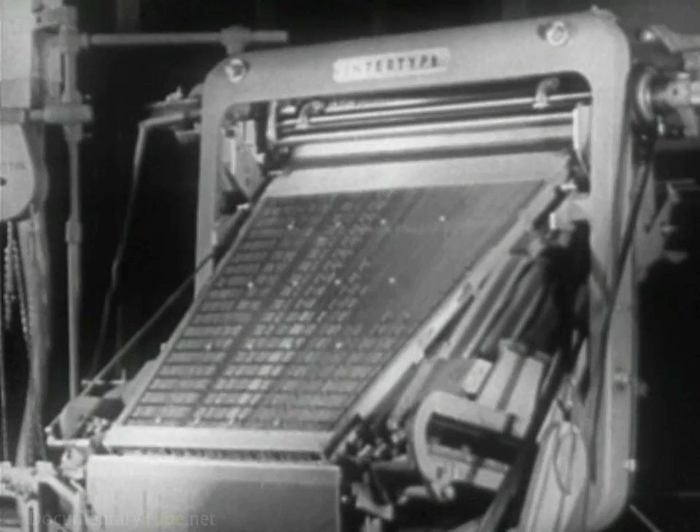Machines which set type up in lines cast from molten metal, first introduced at the close of the last century, are now the most widely used.

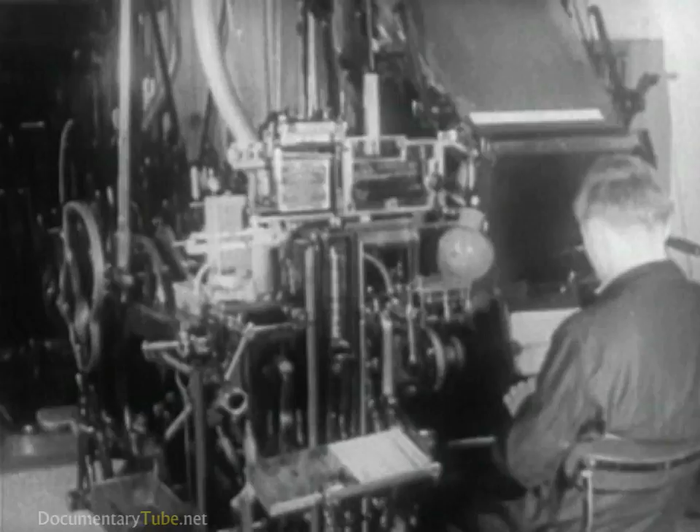Automatic typesetting of complete lines. These are the intertype and linotype machines, which are essentially the same except for the vast assortment of models designed to perform the particular needs of various types of special jobs. These composing machines produce type cast in complete lines or slugs. Here is a slug or line of type turned out by these machines.

The lines of type, properly arranged, make up the page from which, after inking, the imprint or proof is made.

The function of the keyboard composing machine is to produce the essential materials required to prepare a form for printing. But before going into detail, let's first get a general view of the whole picture.

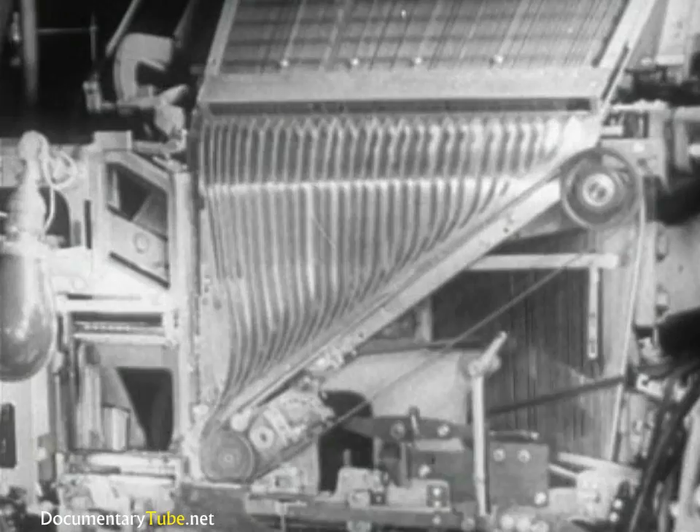The operator, depressing the keys, releases matrices from the magazine channel. The matrices are delivered to the assembling elevator in the correct sequence.

Here's a close-up of some mats. You can see the letter that has been punched or engraved, into which the molten type metal is going to be injected. Let's note particularly the two punched characters, one Roman in style and the other italic.

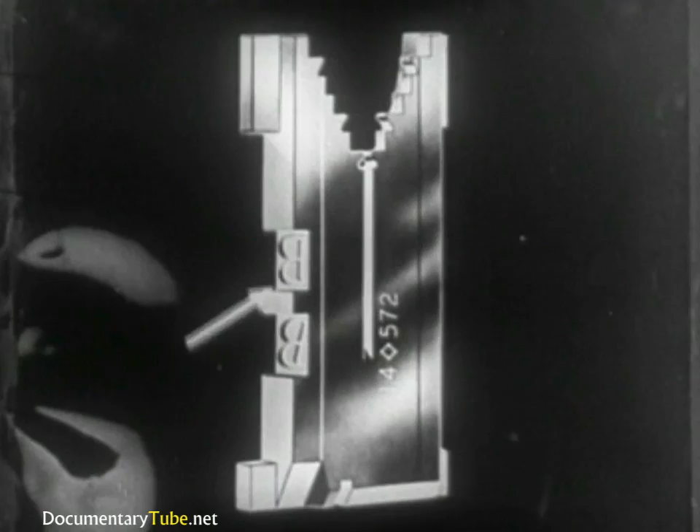The small lugs and the ears guide the mats through the various passages and assure the alignment of the letters.

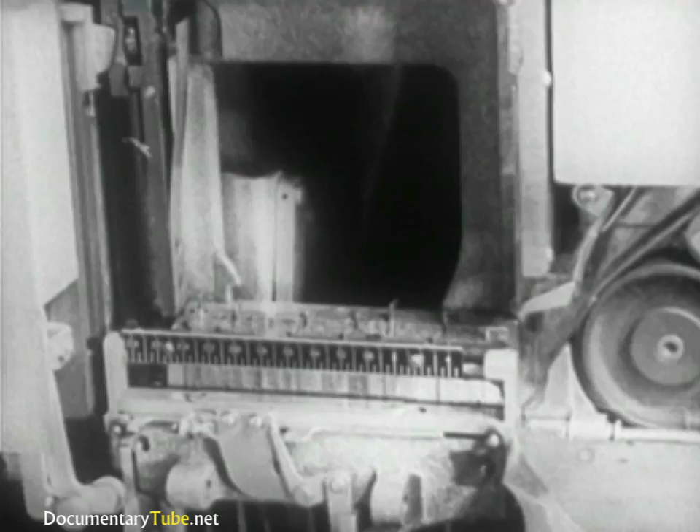Having completed the composition of the line of matrices, the operator sends it over to the casting mechanism. Now the line of matrices is in position for the slug to be cast.

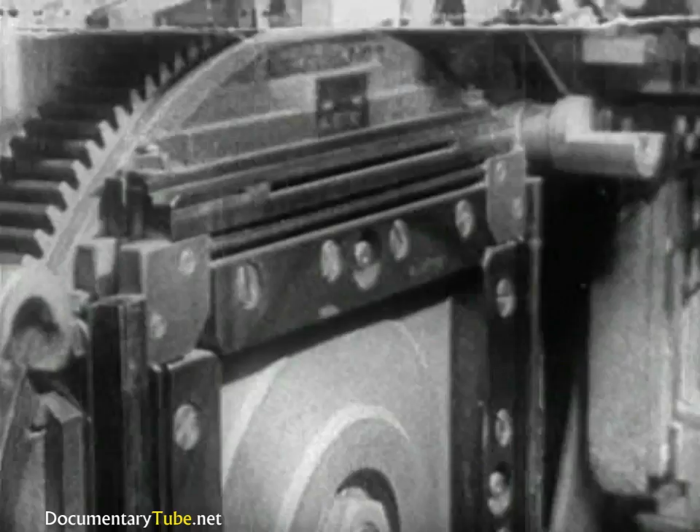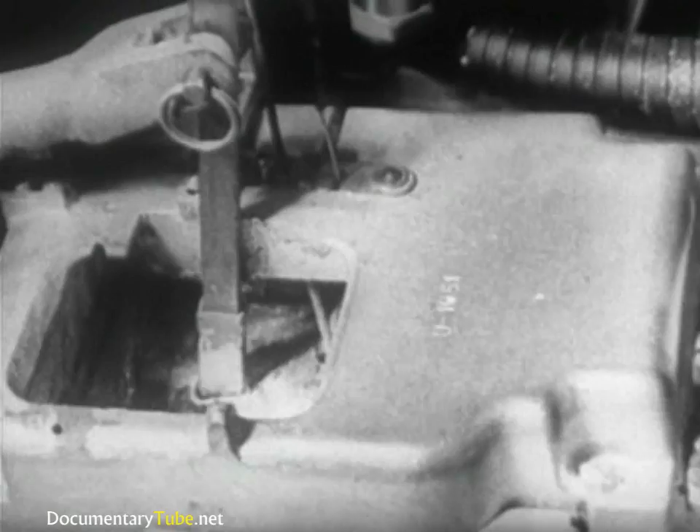Against the opening of this mold, the mat will fit perfectly. Immersed in the crucible, the plunger injects the molten type metal into the mold and against the matrix characters. The metal solidifies, forming letters and symbols in relief.

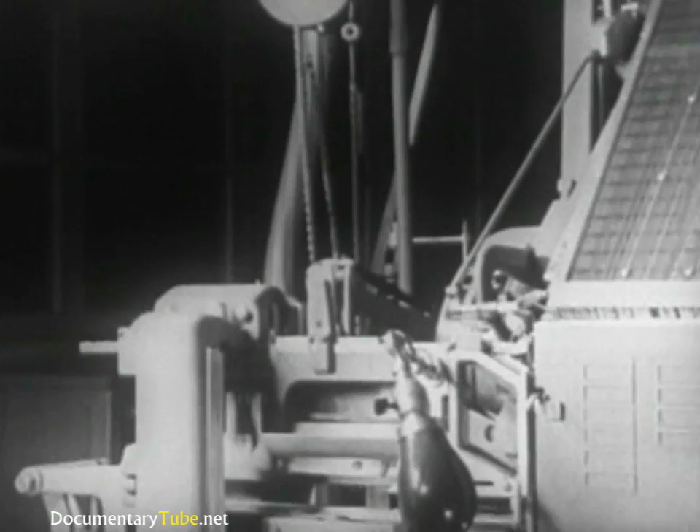Then the slugs are carried into position to be ejected from the mold and stacked one after another as they are ejected. Meanwhile, the first elevator rises and the second elevator descends to meet it at the transfer channel.

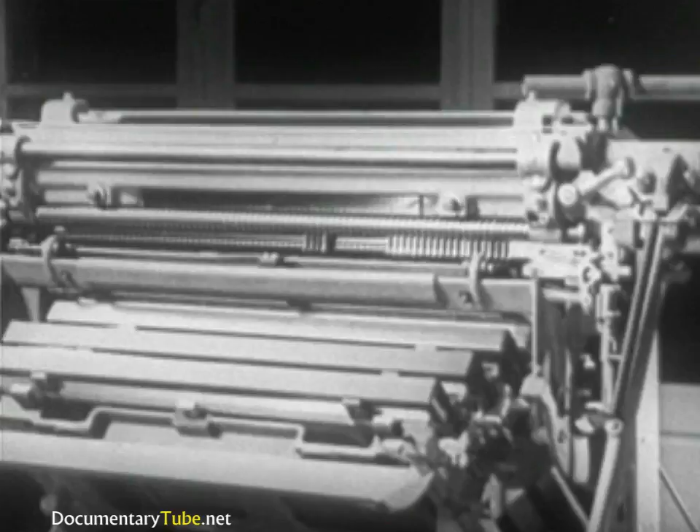The matrices are transferred to the second elevator and raised to the distributor. Here, lifted automatically one at a time, they are returned to their respective channels in the magazine. These circulating matrices will be used over and over as they are needed for composition.

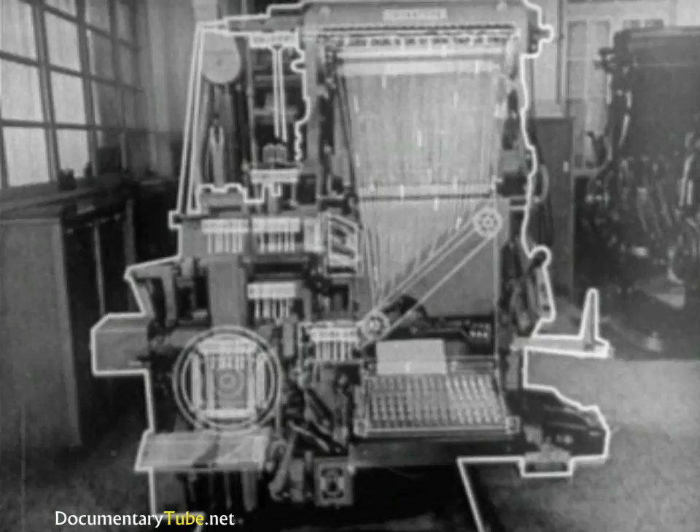Using this simple sketch of the machine, let's go over the various steps already seen. The mats, responding to the keyboard, are delivered to the assembling elevator. The line of matrices is sent to the casting unit. After the slug has been cast, the matrices are carried by the elevators and transferred for distribution.

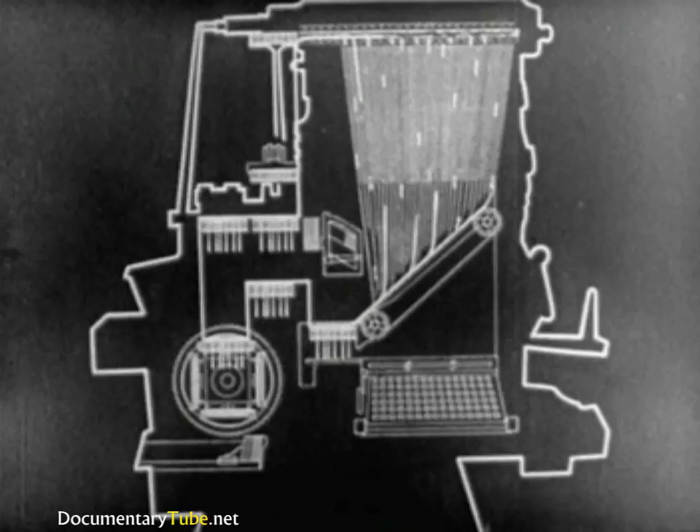The operations necessary to produce a slug or line of type are divided into three groups: composition of the matrix line, casting of the slug, and distribution of the matrices.

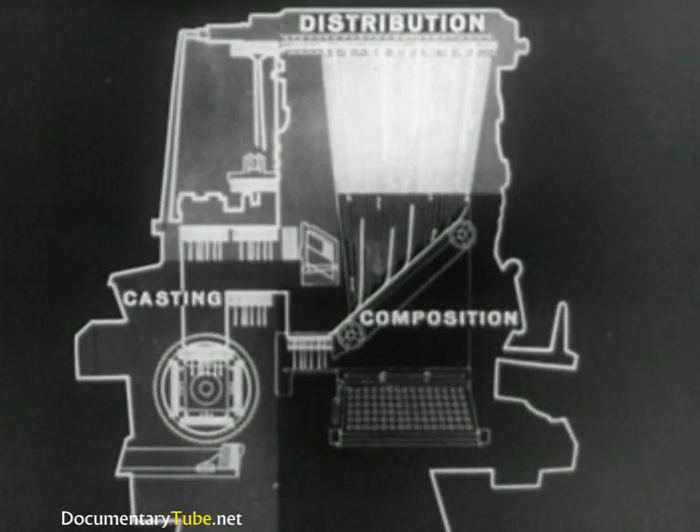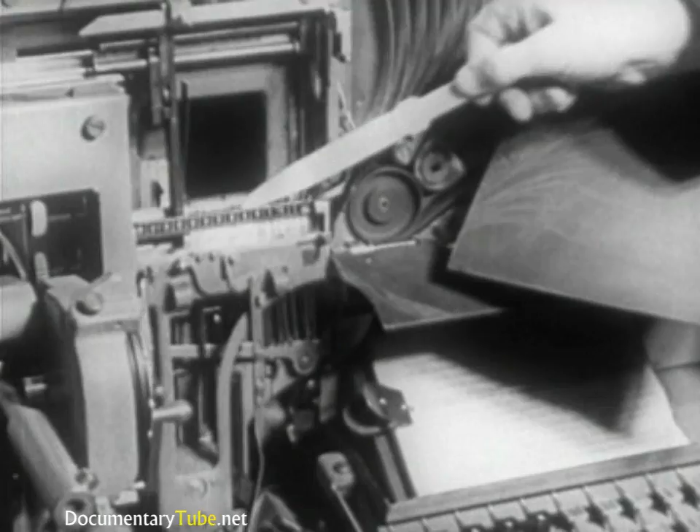Let's now analyze the operations in the first group, composition. Regarding composition, the principal parts are the keyboard, the magazine, the assembler entrance, partition, the matrix delivery belt, the assembling elevator, and the delivery slide.

The keyboard has 90 keys on 6 rows of 15 each. It is divided into 3 sections. The lowercase letters are at the left, uppercase in similar arrangement at the right. At the center, punctuation marks, numbers, and small caps.

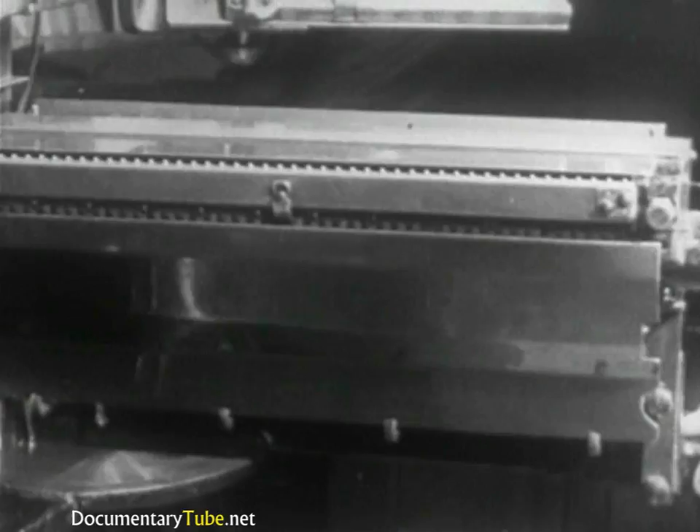Every touch of the key releases the required matrix from the magazine. Now we will examine the internal parts of the keyboard activated by one touch of a key to release a matrix from the magazine. They are the key button, the keyboard lever, the key bar, the trigger, the cam frame, the eccentric cam, the rubber roller, the comb, and the key rod.

Let's observe how the various pieces react to the key. The key moves the lever to which it is joined. This lifts the key bar.

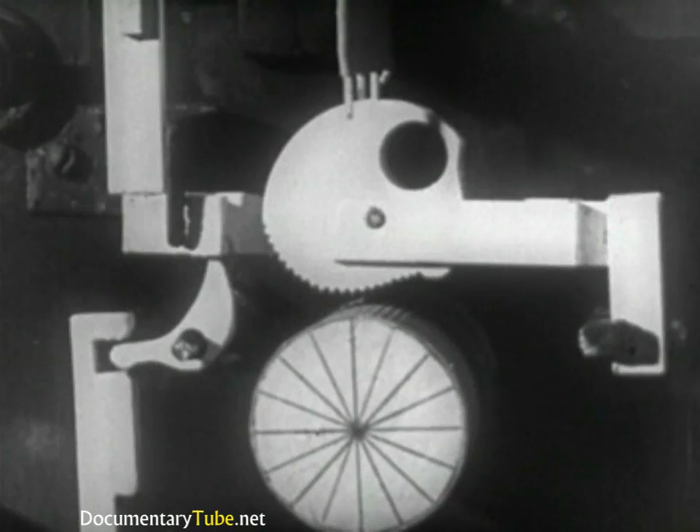In turn, the key bar activates the trigger, whose function it is to support the frame with its corresponding eccentric cam. The motion of the trigger allows the frame to lower itself so that the cam revolves around the rubber roller, which rotates continuously.

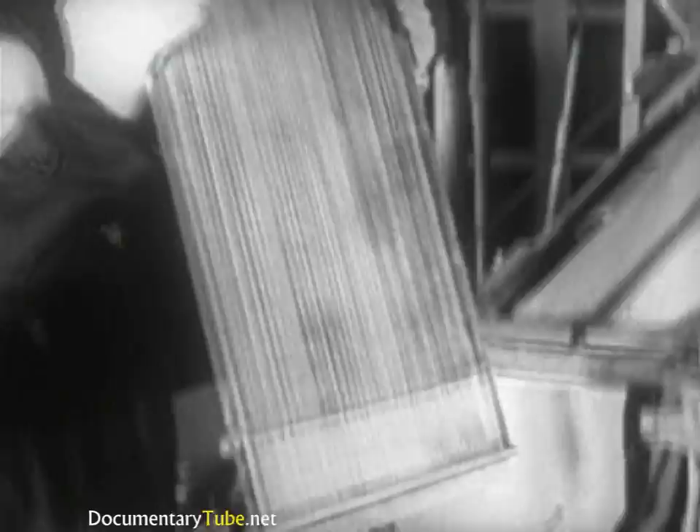The rotation of the cam lifts the end of the frame. This raises the long key rod, which causes the release of the matrix from the magazine. Similarly, we find on every machine, corresponding to the keys, 90 key rods which make up the assembled key rod frame.

This frame is situated behind the assembler entrance and brings the keyboard into play with the magazine. Here are the upper ends of the key rods, which rock escapements situated in the magazine, thus allowing the mat to be released.

Let's study this operation more closely. The upper end of the rod transmits the movement to a half-moon-shaped device called the escapement. The two ends of the escapement are called lugs. Penetrating the magazine, they control the release of the matrices.

The mat in the first row is held up solely by the front lug of the escapement. As the key rod lifts, the front lug of the escapement lowers, releasing the first mat. At the same time, the rear lug is lifted and holds the second matrix.

As the key rod lowers, the spring returns the escapement to a position of rest, thus allowing the second mat to move forward in the place of the one released an instant before. The same operations are repeated at every touch of a key.

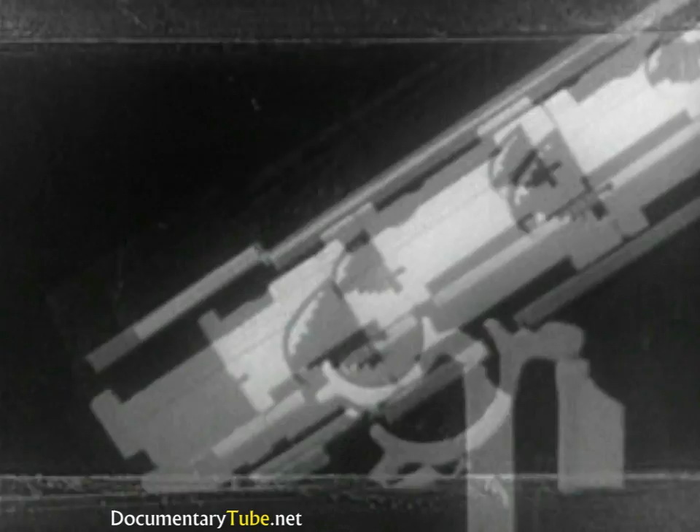The mats that we see come out are arranged in the magazine situated at the upper part of the machine. It rests in a slanted position to facilitate the descent of the mat. It is substantially formed by two trapezoidal plates, one below and one above, which, as in our case, can be made of Vistalite.

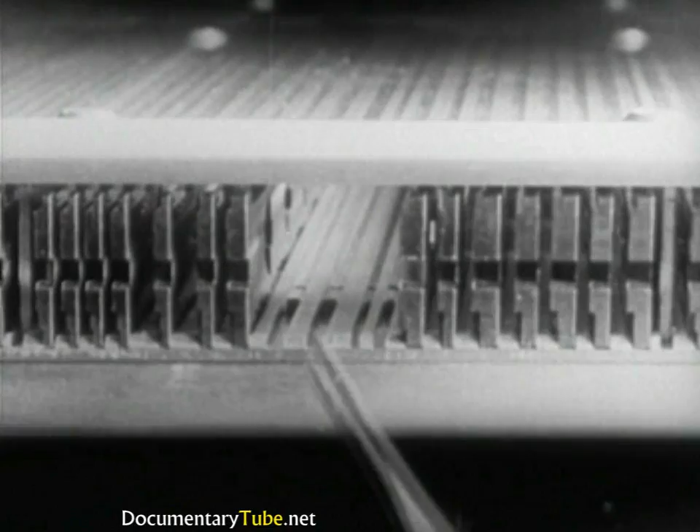On the inside of the magazine there are grooves called channels, which support and guide the circulating matrices. The magazine has 90 channels, corresponding to the 90 keys on the keyboard. Every channel contains a maximum of 21 circulating mats, which are sufficient for the normal requirements of composition.

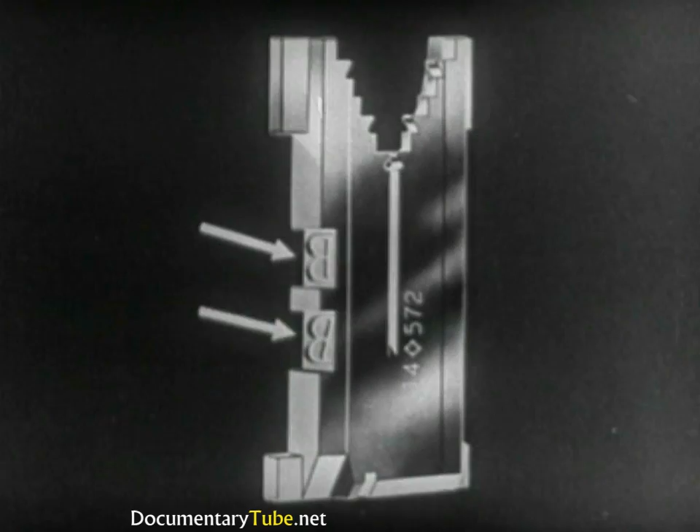Generally, a mat carries two letters, Roman and italic, or Roman and bold. A magazine contains lowercase letters, Roman and italic, controlled by the left section of the keyboard. The uppercase letters, Roman and italics, controlled by the right section. The small caps, numbers, and punctuation marks, controlled by the middle section of the keyboard.

In changing to another type, larger or smaller, the magazine must be changed. Similarly, in going to another series or letter design. It is precisely for this reason that machines are built with a capacity of up to 4 movable magazines, any of which can be replaced with others.

The pre-selected magazine is brought into working position with the escapements aligned over the key rods. The mats released from the magazines are now directed toward the assembling elevator. Now we'll see the whole operation in slow motion. They are guided in their descent by the assembler entrance partitions, which prevent them from turning out of correct position.

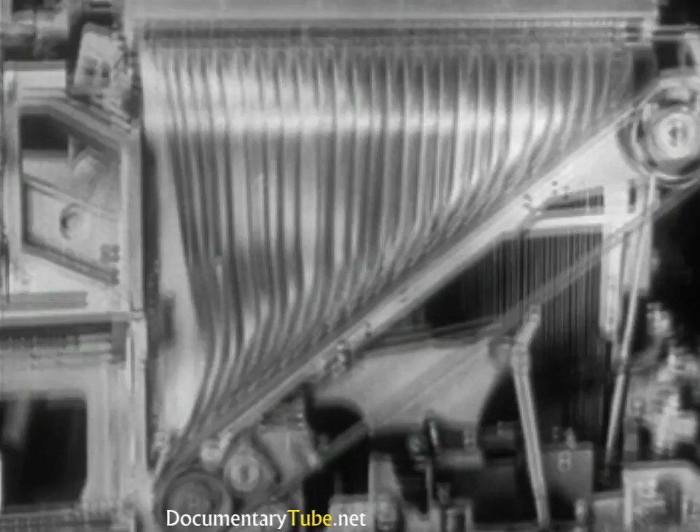Before reaching the assembling elevator, the mats have to pass under a small spring blade called a chute plate, which cuts down its speed so that the rotating star wheel can turn it upright and move it forward against the others in the assembling elevator.

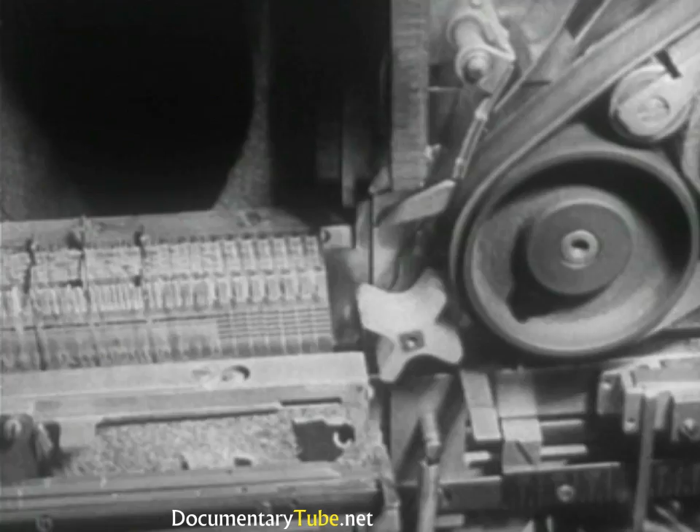At the left, the mats are held upright by a wedge or a finger attached to a long horizontal bar called a slide, which travels to the left as fast as the mats arrive.

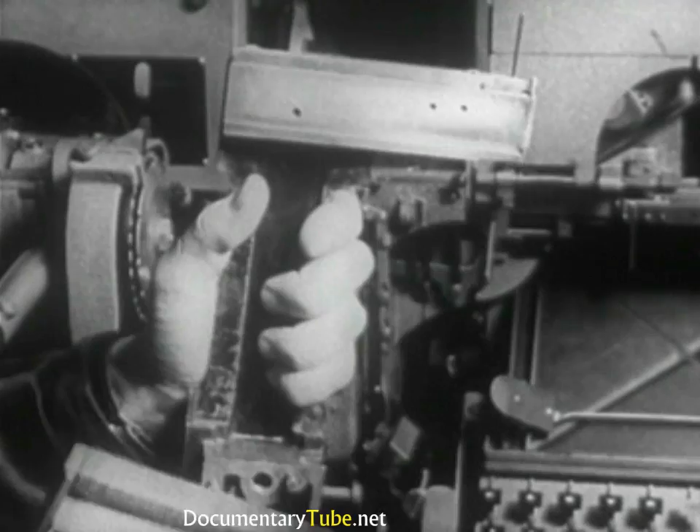The assembling elevator consists of a front and a back plate. When fastened together, they form a channel in which the mats can assemble.

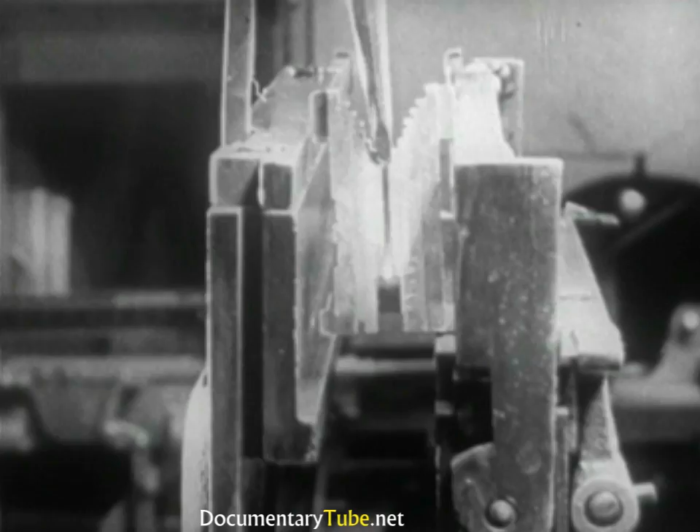These moving levers control the duplex rail. With this device, the mats can assume 2 positions in the assembling elevator. Mats in the first position, Roman, rest on the fixed lower rail. Mats in the second position, italic or boldface, rest on the movable duplex rail. Hence, each mat can present independently to the mold opening either one of the 2 characters.

Here is a line of matrices which illustrates this principle. For greater convenience, the upper part of the assembling elevator is equipped with a hinged gate.

A steel wedge known as a spaceband is assembled between one word and the next. The spacebands are released by the key situated at the left of the keyboard. Because of their dimensions, the spacebands cannot fit into the matrix magazine. Therefore, they are stored in a box above the assembling elevator.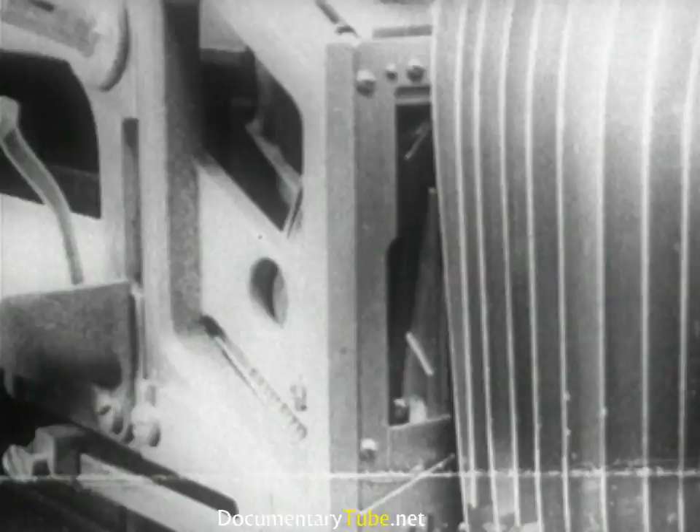The parts for releasing the spaceband are similar to those which release the matrices from the magazine. The spaceband consists of 2 parts, the tail, the slide, and the small head. Both are wedge-shaped. They are held together by a dovetail construction.

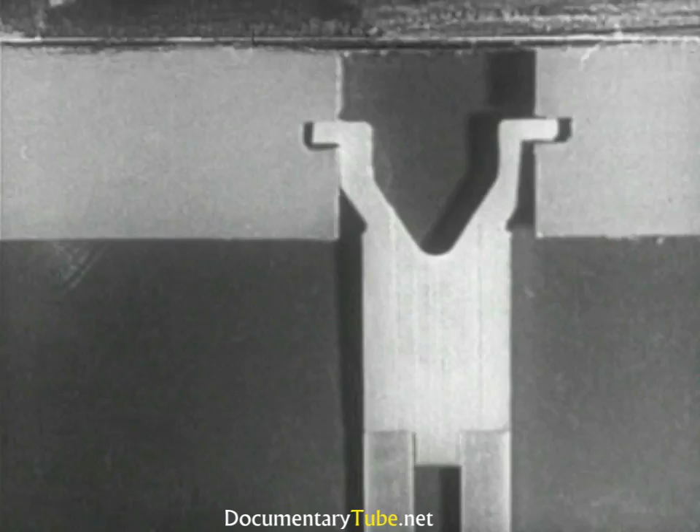The small head is held stationary by the lugs in the grooves of the first elevator, so it remains fixed when the corresponding slide rises. In that manner, the expansion of the spaceband is obtained. Whatever the position of the slide, the outside surfaces of the slide and head are always parallel, due to the construction of the parts.

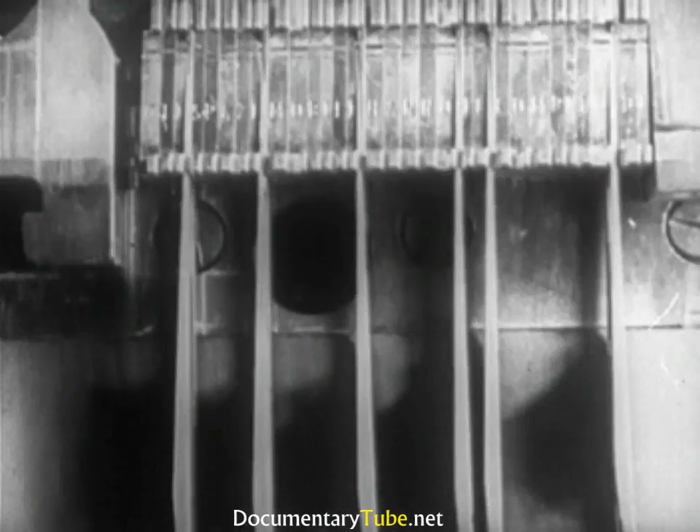The function of the space bands is to expand or spread out the line to the predetermined length, thereby increasing the space between words evenly. This is called justification.

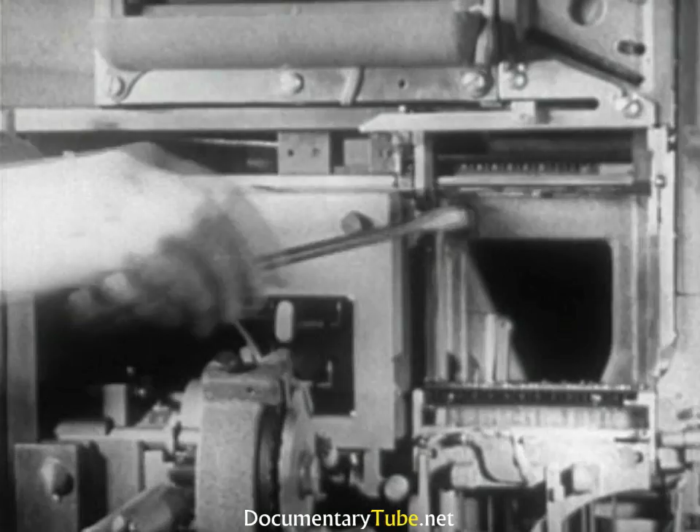Having completed the line and checked that the number of space bands is sufficient for the amount of expansion needed, the operator can send it to be cast. The transfer is carried out by the delivery slide, constantly held under tension by a spring, and held in place by a small lever which will be released by the raised assembling elevator. The delivery slide consists of a long fixed finger and a short moving one. They receive the line and carry it through the transfer channel to the first elevator.

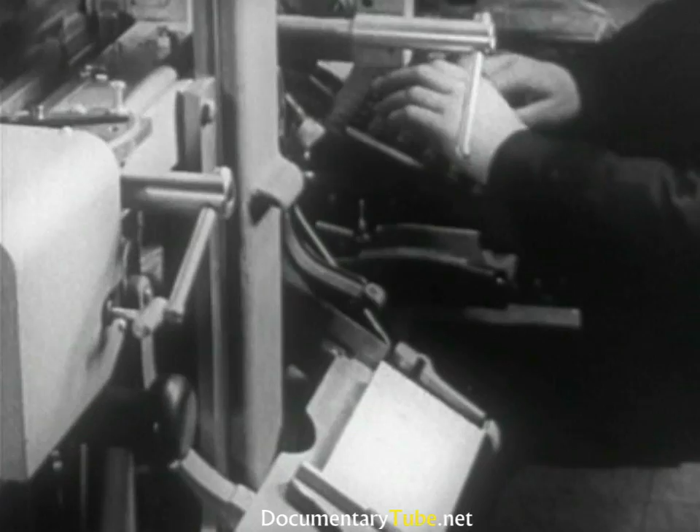At this point, we end the operations of the first group and take up the second, the casting. Note that the casting unit starts operating automatically as each matrix line is delivered. It takes from 5 to 10 seconds for a complete cycle, depending upon the speed of assembly. All the while, the operator continues to compose.

Let's go into the explanation of this group. A 1/2 horsepower motor supplies the drive transmitted by a large pulley through a transmission gear and belts.

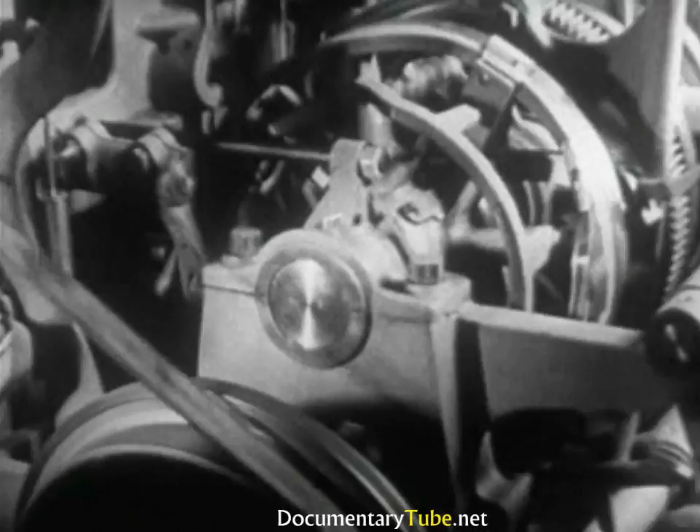Many of the basic mechanical actions of the machine depend on the 10 large eccentric cams situated at the rear. With a series of springs, they make up a completely automatic setup. These eccentric cams are synchronized to rotate together, since they are all mounted on the same shaft.

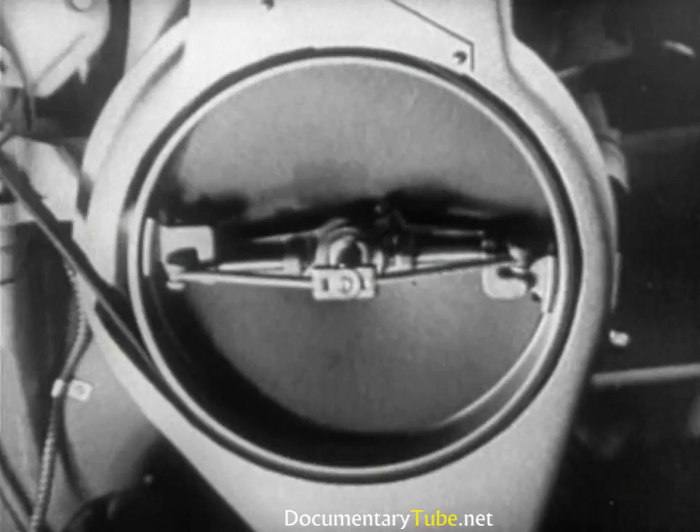The cams begin to rotate as soon as the delivery slide carries the matrix line into the first elevator jaw. This releases a stop in the delivery cam at the rear of the machine. The 2 friction shoes of the driving clutch are then pressed against the inside of the driving pulley, thus causing the driving shaft to rotate the cams. At the opposite end, this shaft has a pinion that transmits the movement to the large driving gear on the cam shaft. The cams are thus made to rotate.

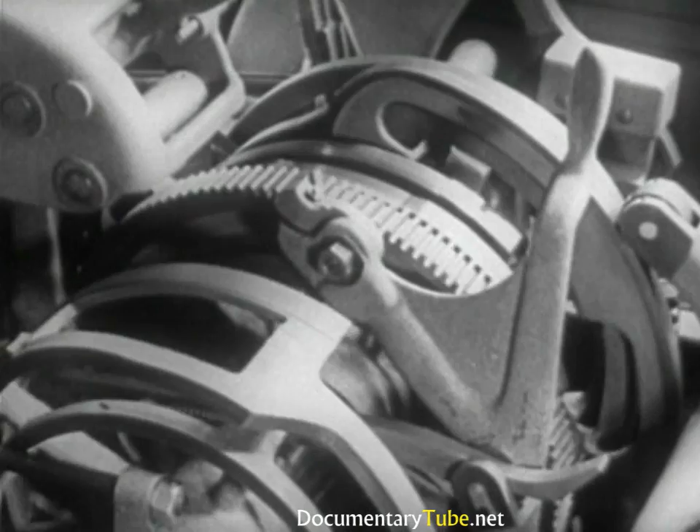Every complete turn of the cam shaft corresponds to the casting of a slug. Every eccentric cam has a specific function which it carries on during its cycle, quite independently of the others.

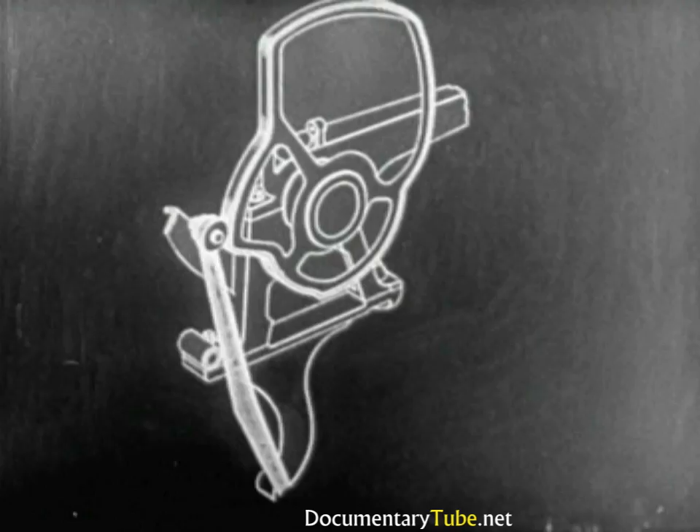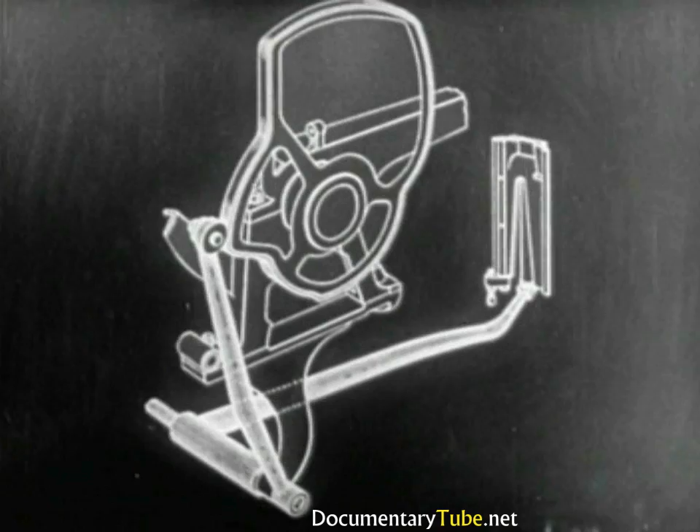To get an idea of how the cams work, let's observe the first of the series that controls the first elevator. The first cam, by means of the vertical lever on a pivotal mount, and the long horizontal lever which runs through the base of the machine, transmits the movement of the first elevator. Every turn of the cam corresponds to a determined movement of the elevator, as we see in the close-up combination.

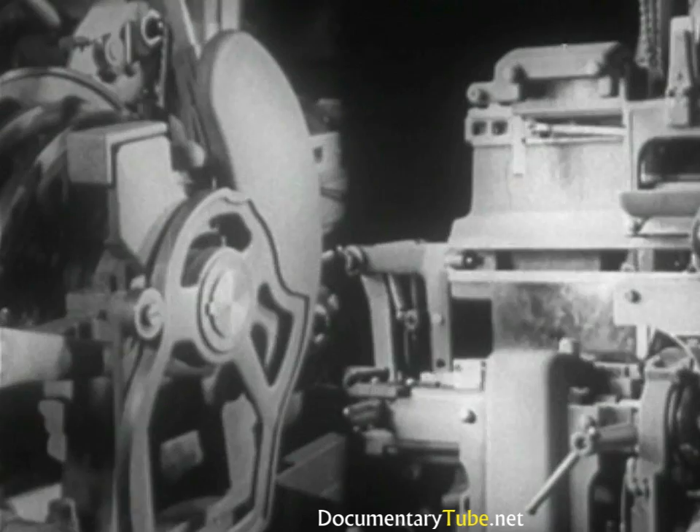The cam makes the elevator descend to the vice cap and holds it in casting position. The cam next raises the first elevator to the intermediate channel for the transfer of the mats. Then the cam permits the elevator to return to normal position.

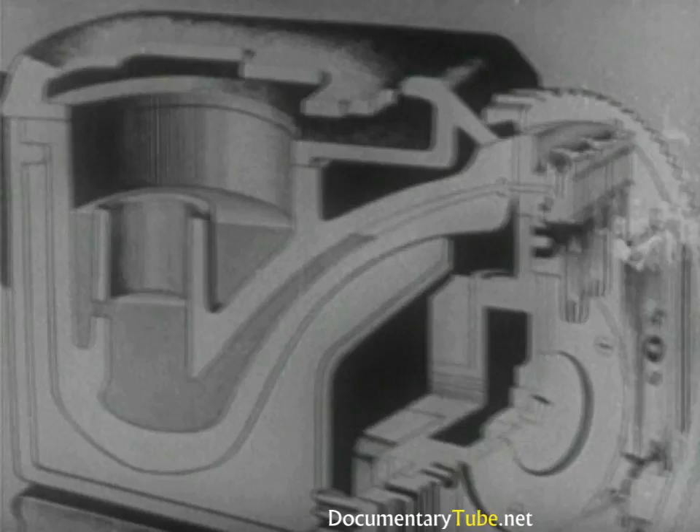Here are the other parts which, with the cams, make up the casting: the vice frame, the mold disc, and the metal pot. This is made of an outside casing or jacket and provides thermal insulation to the crucible that contains the molten type metal. Between the casing and the crucible, there is a cavity stuffed with asbestos.

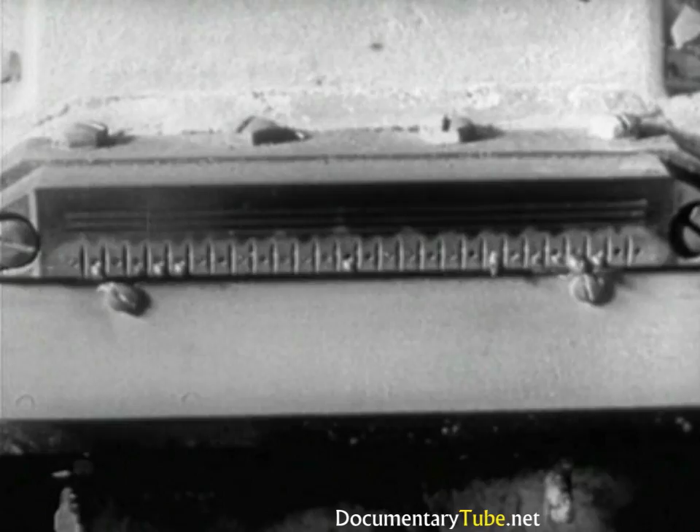The plunger is in the well of the crucible, at the front of which there is a mouthpiece. When the plunger descends, it drives molten metal into the mold against the matrix line, thus casting a slug with the letters in relief. The type metal solidifies almost instantly.

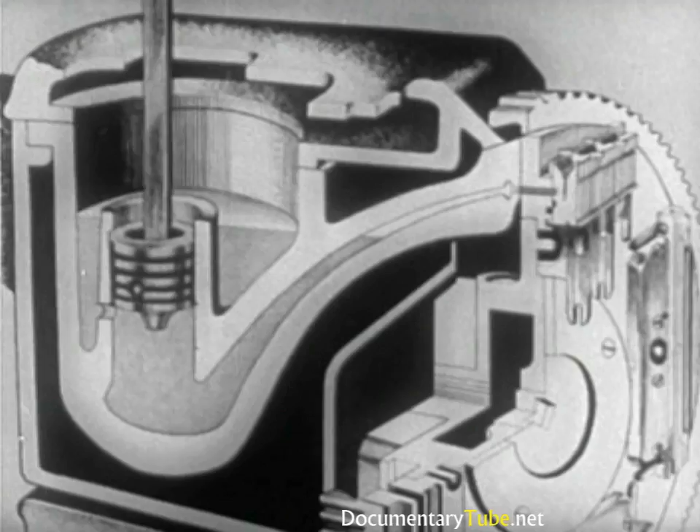Then the plunger rises again to normal position and sucks molten metal into the well to replace what was used up in the previous casting. Automatic feeding regulates the descent of the metal pig to maintain a constant level of the molten metal in the pot.

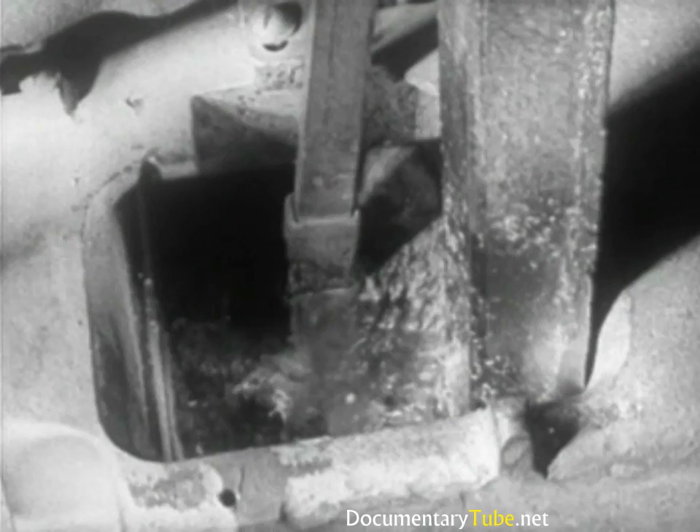This metal is a triple alloy composed of lead, 85%, antimony, 11%, tin, 4%. The temperature for casting, approximately 285 degrees centigrade, is kept constant by thermostat. The metal pot is always kept heated so that it is ready to cast slugs each time the mouthpiece moves forward and locks against the back of the mold.

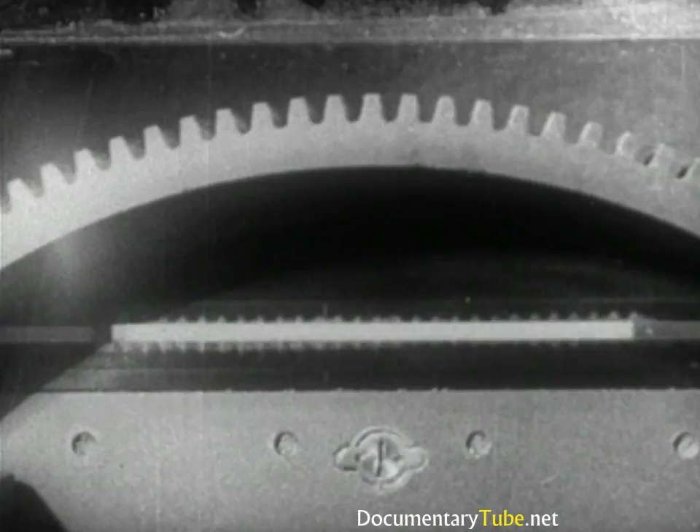The mold is mounted on a rotating disc. The disc has teeth which are geared to a pinion activated by two sections of gears, so that it rotates at intervals.

Normally, the wheel carries 4 molds for casting.

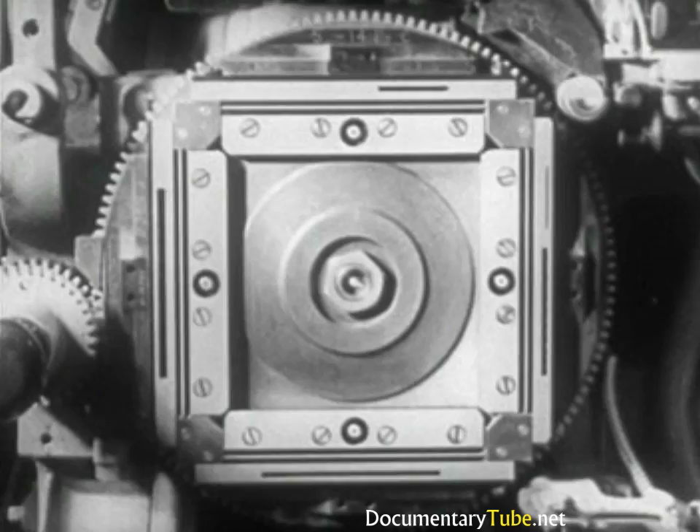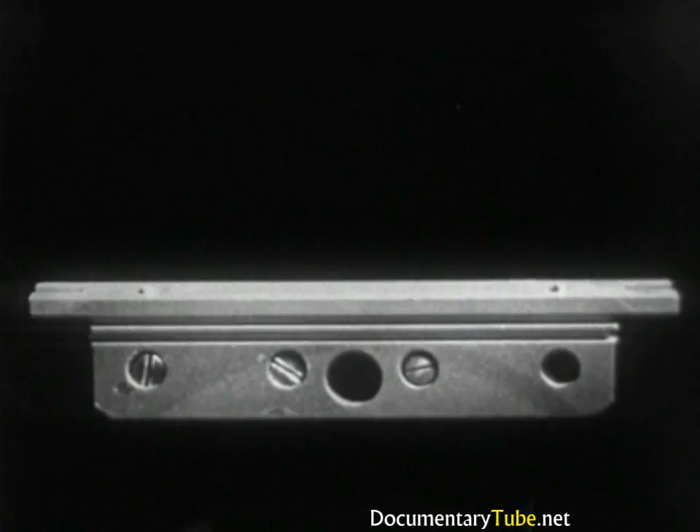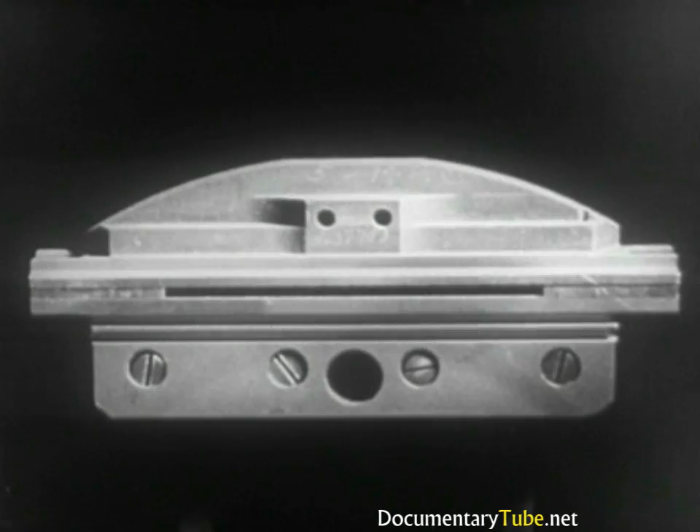The mold is made up of the following parts: the body, fastened to the disc with 4 screws, and the cap. Between the body and the cap there are inserted, depending upon production needs, precision liners, constant length at the right and variable length at the left. The liners determine the length and thickness of the slug. Therefore, the purpose of the mold, as the word shows, is to establish the dimensions of the lead slug, which may vary in length and in thickness.

To avoid constantly changing the liners, there are usually 4 molds mounted on the disc. Naturally, only one of these is pre-selected for a given job and must be in vertical position at the right.

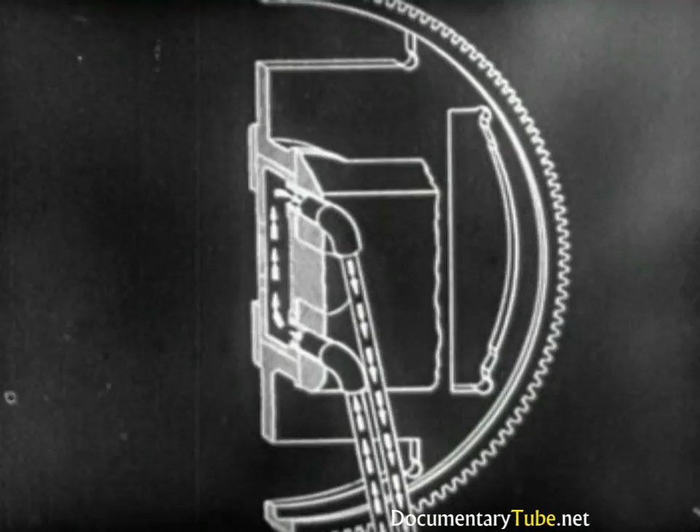Behind this mold is situated the ejector, whose function it is to expel the slug at the right moment. To avoid overheating of the mold, in certain models, water is made to circulate on the inside of the disc, as we can see in this diagram, while in others, the same effect is obtained by air blower.

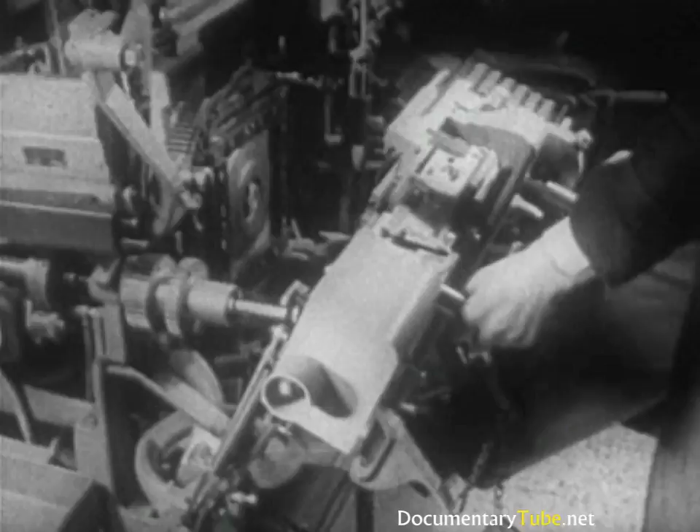In front of the mold disc, there is the vise frame that can be opened when necessary. Important parts of the vise are the first elevator, the vise jaws, the justification block, the knife block, and knives.

The first elevator jaw is so arranged as to receive the line of matrices from the delivery slide and to lower the line between the 2 vise jaws.

The jaw at the right is fixed, while the one at the left is movable. The latter, set in advance, determines where the left end of the matrix line will be positioned with respect to the mold opening. The justification block, driving the spaceband wedges upward, spreads out the line of matrices.

2 vertical knives trim the sides of the slug. One knife is movable and the other stationary. The movable one is adjustable in advance according to the type size called for.

After pointing out many parts involved in casting, it will now be easy to review the operations involved in the casting of a new slug.

The elevator lowers the matrix line between the vise jaws. In the meantime, the mold disc makes a quarter turn to put the mold in position for casting. It advances slowly to engage the lugs of the mat in the alignment grooves of the mold body.

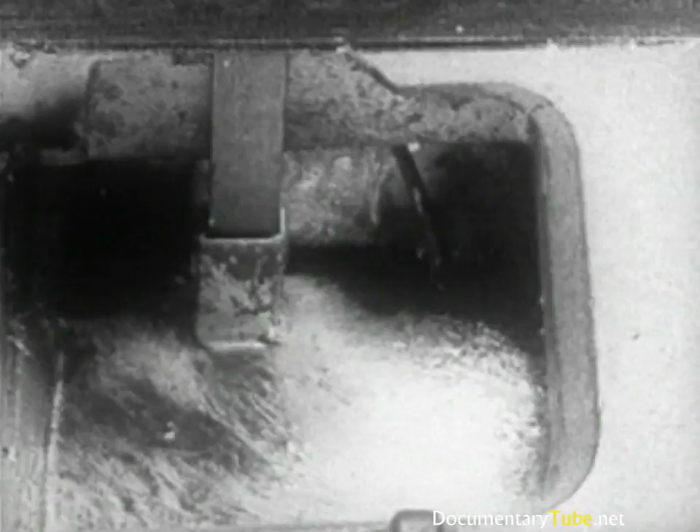The justification block raises the wedges of the spacebands, which expand themselves between the words and spread out the line. The metal pot advances against the mold, locking the mouthpiece tightly against the mold and the mat. This is the instant in which the plunger injects the molten type metal into the mold under pressure, casting the slug with the letters in relief.

The plunger rises, the pot and the disc retract. The justification block comes down. The mold disc starts its 3/4 turn, during which a knife, located behind the disc, trims the base of the slug, bringing it to exact printing height.

Now the ejector blade forces the slug between the 2 vertical knives, which trim it on both sides. Then it falls into the galley.

Immediately after casting, the first elevator carries the line of mats to the second elevator.

Now, the casting operations completed, the distribution operation begins.

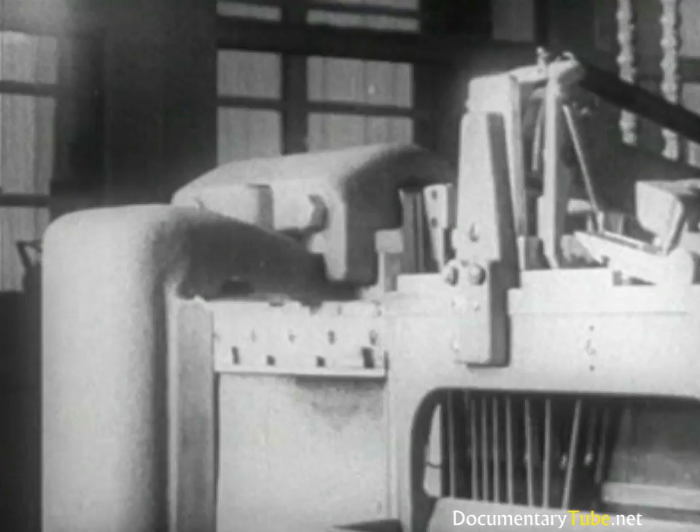Now the line of mats is aligned with the tooth bar of the second elevator, which has seated on the transfer channel. The transfer finger, moving the mats toward the right, forces them from the first to the second elevator.

The mats glide onto the second elevator bar and remain there, suspended by their teeth. As soon as the transfer has been completed, the elevators return immediately to their normal position.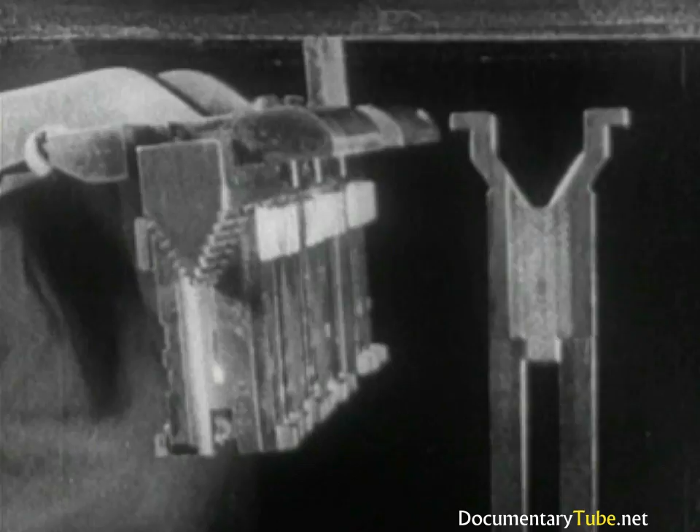The spacebands, which do not have teeth, remain in the transfer channel. During the second closing of the transfer levers, the spaceband pawl engages the spacebands and returns them to the box.

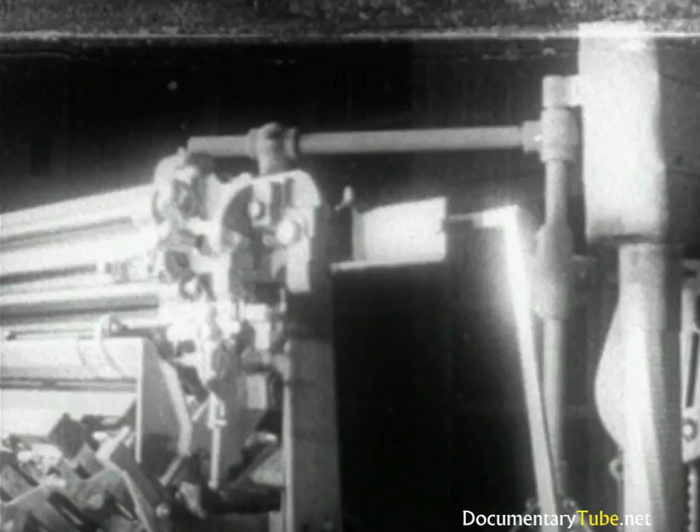The distributor shifter retracts, allowing the second elevator to seat at the distributor. Then the shifter pushes the mats into the distributor box.

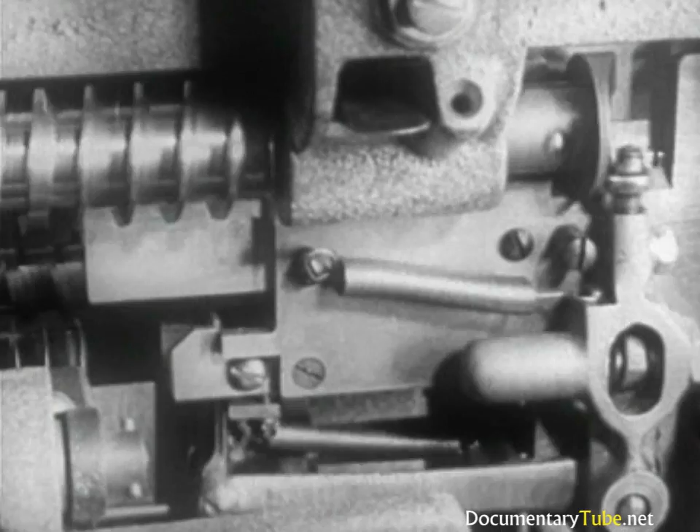Here the mats are raised, one by one, by the matrix lift. The slight lift is sufficient to insert the mats into the coils of the three helicoidal screws. It should be noted that it is not the function of these screws to keep the mats suspended, but only to push them ahead.

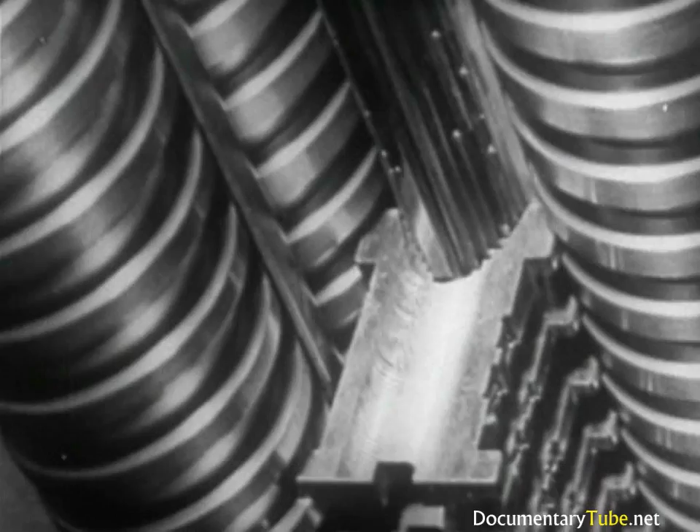The two upper screws engage the ears of the matrix, while the lower one engages the lower front lug.

To keep the mats suspended up to the moment of their release into the magazine is the function of the distributor, on which they glide, suspended by their combination teeth. Every mat is therefore supported on the distributor bar by means of their teeth, as we can see here. For example, the mat of the letter O will remain suspended on the bar with the second and third tooth combinations. This other one, corresponding to the letter U, will remain suspended with the fourth tooth combination.

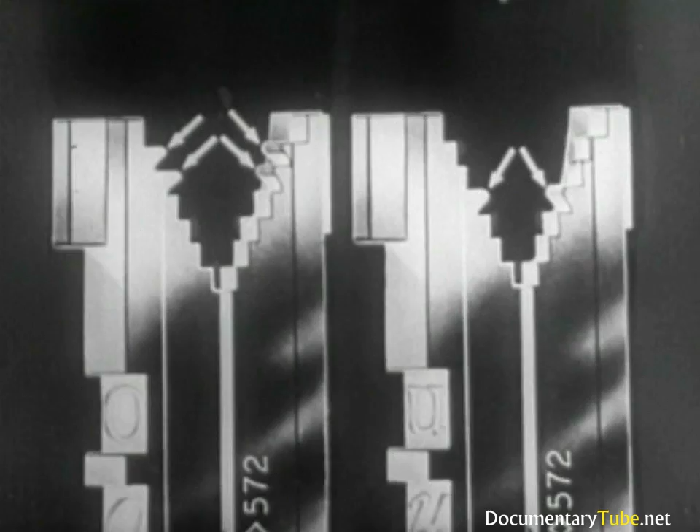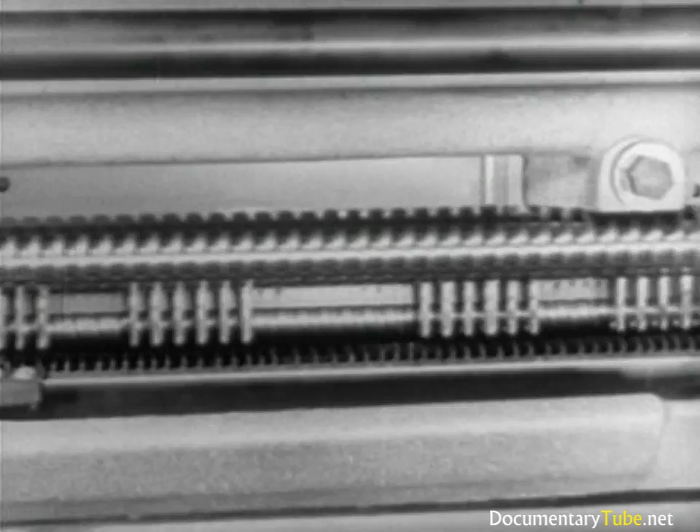When the distributor bar fails to supply the required combination, the mat, no longer having support, drops into the magazine. Therefore, for the 90 magazine channels, there are 90 different tooth combinations, and consequently an equal number of combinations along the length of the distributor bar. The mats, detaching themselves from the bar, return to their respective channels in the magazine.

Those mats which do not run in the magazine have all of their teeth, so that they run the entire length of the distributor and drop into a chute which guides them into a stacker near the keyboard, where the operator can select them and insert them as needed in the assembling elevator.

Let's now review the entire procedure at a glance. The manipulation of the keys releases the mats from the magazine. They drop between the assembly entrance partition and are delivered to the assembling elevator to form the line.

The finished line is sent on to the caster. The mold and the metal pot advance, and the plunger makes the cast. The pot and the mold withdraw. Then the first elevator rises to transfer the mats to the second elevator bar. At the same time, the slug, trimmed at the base and sides, is ejected into the galley.

The mats go to the distributor. Moved by the helicoidal screws, they run along the length of the distributor bars so that, with the procedure already noted, they fall into the respective channels of the magazine, ready for use in succeeding lines.

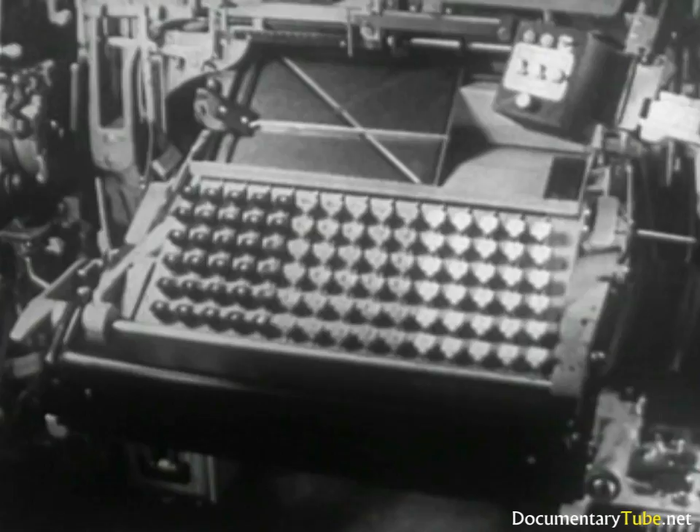As in all industries, technical progress has achieved notable progress in mechanical composition. Here's a sensational one: this machine has been made completely automatic, so that it is not necessary to have an operator touch the keys. The keys are actuated by a tape, perforated in code.

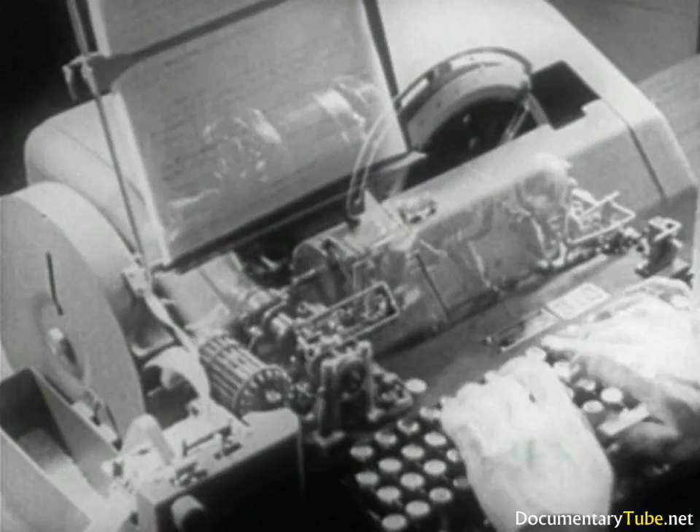This system, known as a teletypesetter, is based upon the principles of the teletype, used in many newspapers both in Europe and in America. The ribbon is first perforated by a machine with a keyboard almost like that of a typewriter.

At every touch of the keys, code perforations are made on the tape, which are aligned vertically and numbered from 1 to 6. These two perforations correspond to the letter A. The letter B has 3 perforations. The letter C also has 3 perforations, but different in position. D has 2, E only 1. 3 perforations for the letter F, and so on for all the other letters and symbols. The small central perforations serve only to move the ribbon forward.

At the same time, the width of the mats and spacebands is totaled on the scale on the quadrants. When the line is finished, the keys are hit for the return of the indicator.

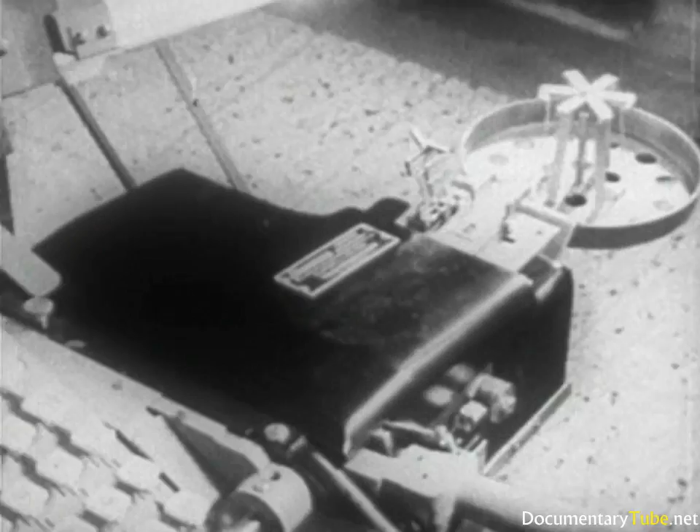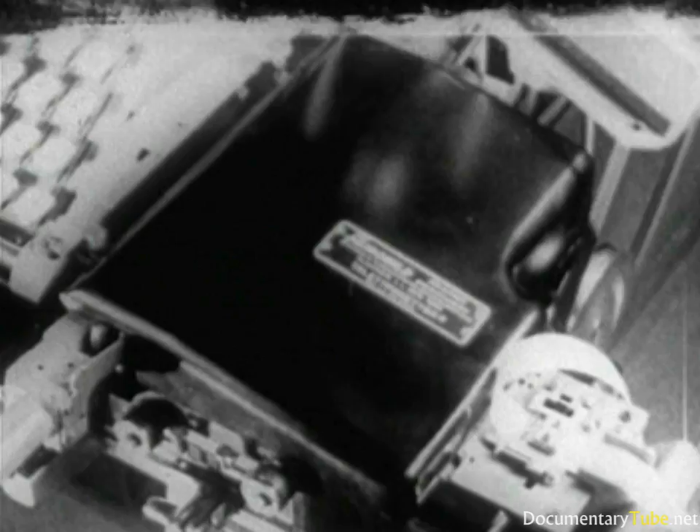Thus perforated, the ribbon is applied to the so-called automatic operator, situated at the right of the keyboard of the composing machine. The reading of the perforated tape is accomplished by the automatic operator, a true jewel of engineering, using six small feelers in series with the perforations.

It is interesting to observe how only the small feelers, which go through the perforations in the tape, transmit the movement to the keys of the composing machine, which translates the codes without error at a top speed of 20,000 letters an hour.

Note that the raising of the assembling elevator is also automatic.

This is the performance of one of the numerous composing machines which, with increasing rhythm, accomplish the important task of preparing composition for newspapers, periodicals, books, and printing of all kinds in all European languages, and in some Oriental ones as well.